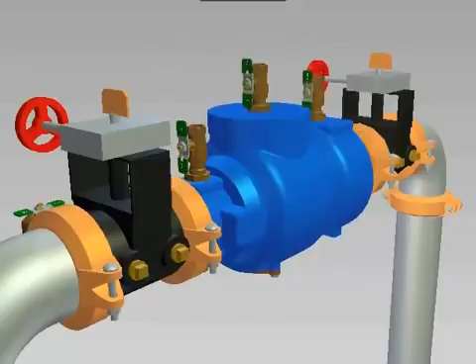Loosen and remove the 2 nuts and bolts on the groove coupling on the cover. Remove the coupling halves, gasket, and the cover. You can drain the water from the assembly by loosening the cover plate on the bottom of the valve. Be sure the O-ring does not wash off the cover plate as the valve drains.

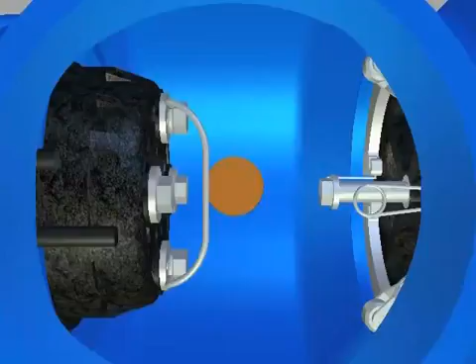To remove the number 1 check valve, locate the 2 tabs of the plastic retainer at the top of the number 1 check. You will want to grasp one of the 2 tabs and push down to remove it from the groove. Then pull straight back and the retainer should spiral out of the groove. Remove the number 1 check assembly.

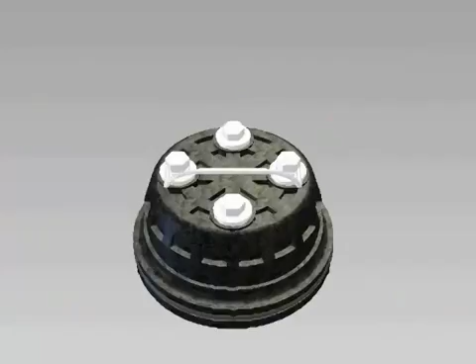Always service the checks one at a time to avoid mixing parts. Both checks can be repaired following the same procedure. You will want to remove the bolts from the seal retainer on the check, then remove the retainer.

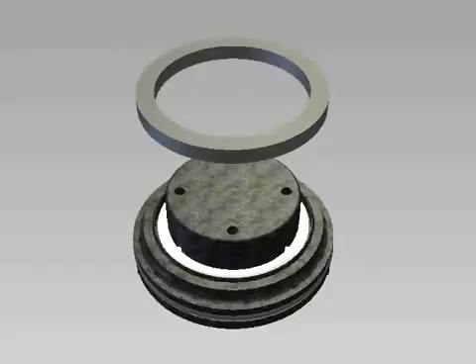Remove the seal ring and inspect the face for cuts or embedded debris. For a temporary fix, you can flip the seal ring over to use the smooth side while waiting for new replacement parts. Inspect the sharp edge of the seat with your finger for any damage. Inspect the O-ring around the edge of the seat for debris or damage.

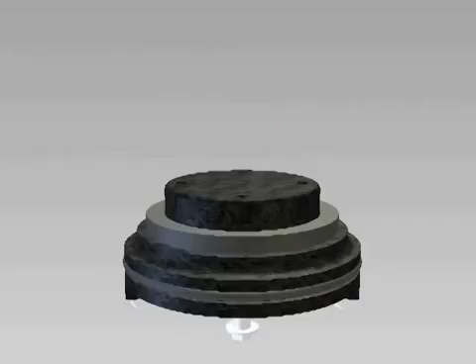Replace any damaged parts. If you are installing a repair kit, replace the seal ring, seat O-ring, and bolt O-rings. Reassemble the check and tighten the retainer bolts evenly. Clean and inspect the O-ring sealing area in the body. Lubricate the seat O-ring.

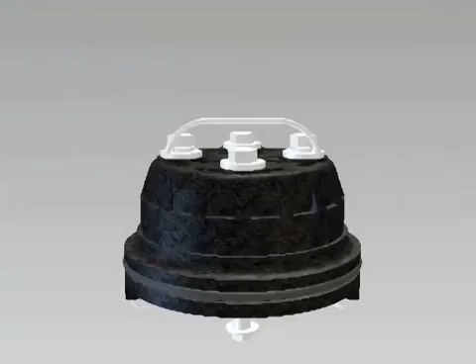To remove the number 2 check valve, locate one of the 2 spring-loaded plate retainers around the face of the check. Pinch the sides of the spring together and rotate the plates out of the body groove, one at a time. Remove the second retainer in the same way. Remove the number 2 check by pulling straight towards the center of the valve.

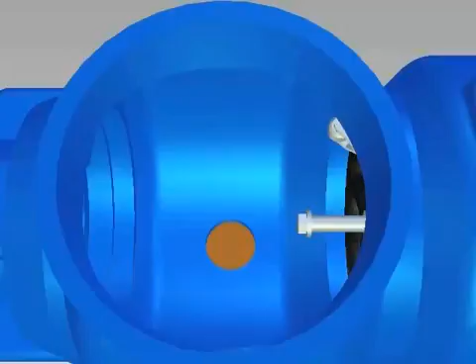After servicing the number 2 check, install it in the body, making sure it is completely seated. The groove for the seat retainer should be completely exposed. If the valve was not drained, water may squirt from the number 4 test cock as the check is installed. Close the number 4 test cock to hold the check in place.

Insert the number 2 check retainers by placing one plate into the groove and then compressing the spring to insert the second plate. Insert the second retainer in the same way. Install the number 1 check in the body and close the number 2 test cock to hold the check in place. If the valve was not drained, water may squirt from the number 2 test cock as the check is installed.

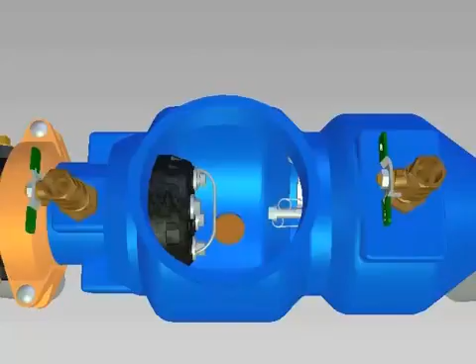Install the plastic retainer by inserting one end into the body groove and then sliding your hand around the face of the retainer, pushing it into the groove as you go. If the bolts on the cover plate on the bottom of the valve were loosened to drain the valve, retighten them now. Be sure the O-ring is still in its groove.

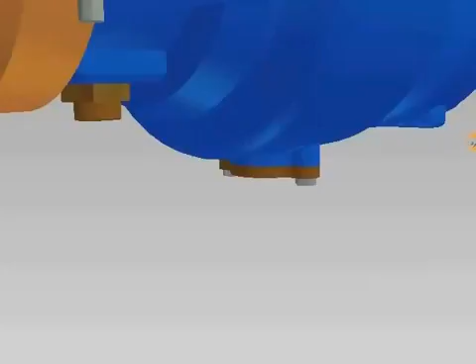Place the groove coupling gasket over the valve opening. Lubricate the outside of the gasket. Replace the cover and reassemble the groove coupling. Make sure the coupling is seated properly and the ends of the coupling halves touch. Close the number 3 test cock.

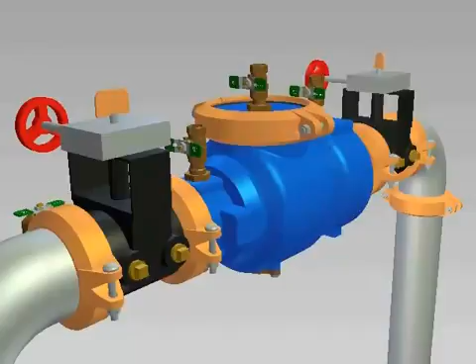Open your inlet valve slowly to pressurize the assembly. Inspect for any leaks. Open and then close test cocks to bleed air from the assembly. Open your outlet valve a small amount and wait for the system to pressurize. Fully open the outlet valve once the system is pressurized. The valve should be tested by trained personnel to confirm that it is working properly.